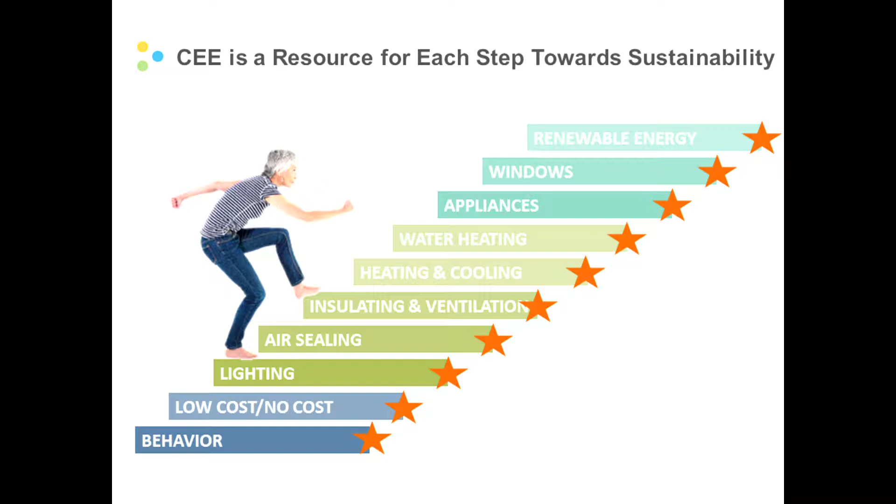We like to think of ourselves as being there for people every step of the way, no matter if you're looking at doing simple behavior change things like turning down your thermostat, or if you're all the way at the top of the ladder looking at renewable energy. We're here as a resource to help you with any questions you might have.

So what are some of the benefits of energy efficiency? I do have some prizes down at my booth. Save money - yes, always the first one. Reducing your bills, that's definitely one of the benefits.

By making your home more efficient, it should also increase the comfort. And you can also feel good by reducing your impact on the environment.

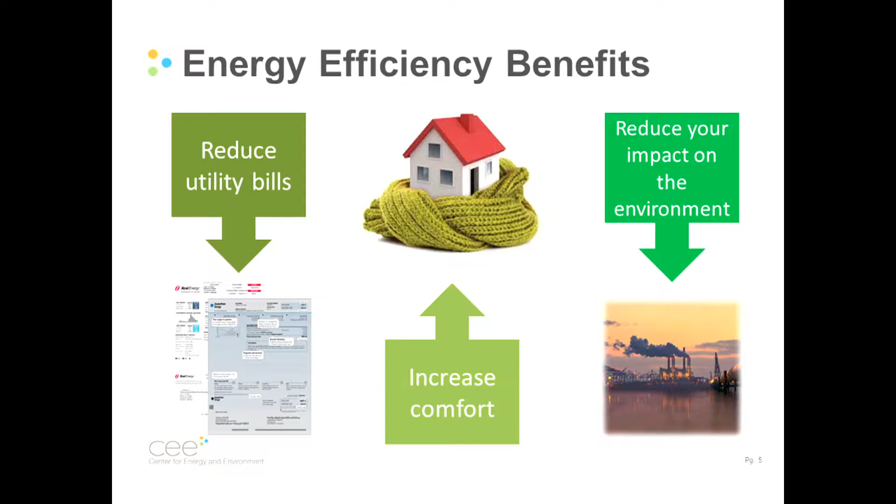We've come up with a recipe for an energy smart home in our 40 years of working on energy efficiency in Minnesota. That involves people having good habits, like turning down the thermostat, using good products. Always looking for the Energy Star label is a good step to making sure you're getting a product that has been tested. And then also making good investments.

Finding out what your different options are for making energy investments in your house, and then going with what's going to be most suitable for your house and also save energy.

I have right here broken down into 4 sectors the use of energy in a home. About 10% of your energy use goes to water heating, about 15% towards appliances, 20% towards lighting and electronics, and then the biggest portion of it, of course, goes to heating and cooling our homes.

I'm going to talk about each of these today, give you a few tips, go over some opportunities for different upgrades in each level.

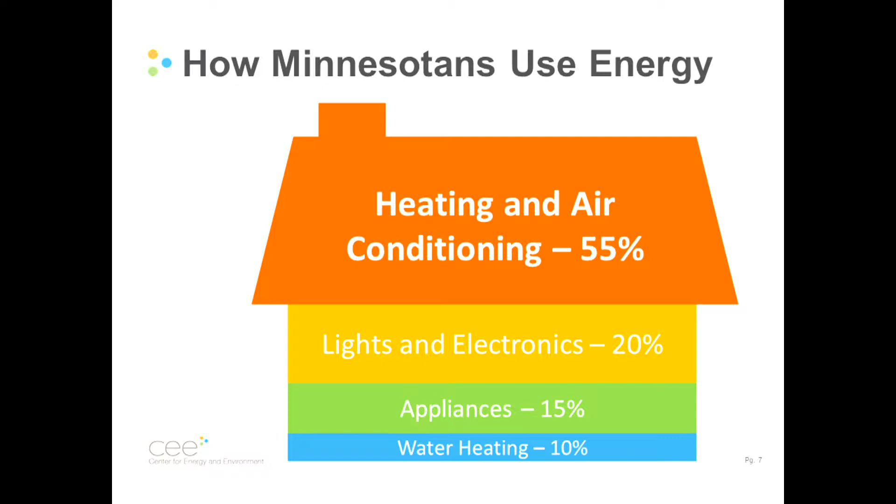Starting at the bottom of the house, the water heater is usually in the basement. Both for safety and efficiency, what's recommended is to have the temperature set at 120 degrees or below. Usually that's where the 2 triangles on the dial meet.

Just at the next notch up, which would be 130 degrees, it only takes 30 seconds of the water running for someone to get burned. Whereas at 120 degrees or less, it takes longer than 5 minutes.

Especially if you have any young children or other folks in the house that might like to turn on the water for a long period of time, just make sure it's at 120 or below, because that's plenty warm, so you can save on your energy and also be safe.

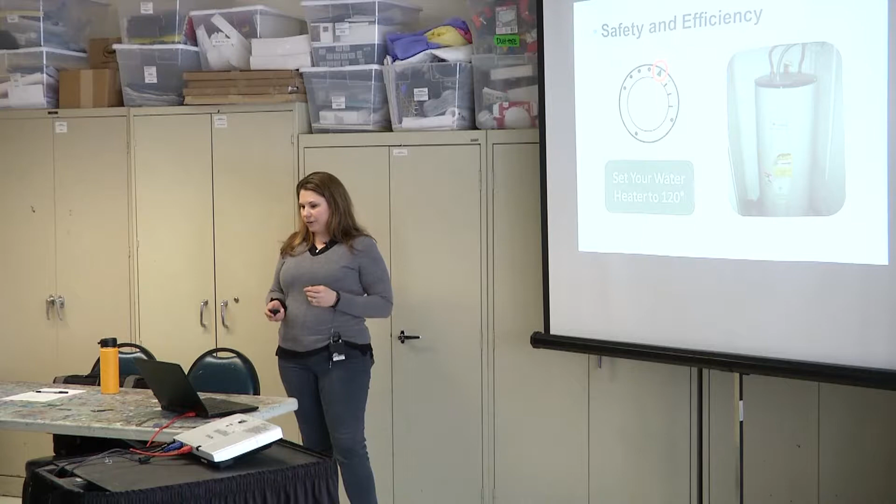Wrapping your water heater with a blanket, which is something we offer with our energy audit programs for no cost, will help provide an additional layer of insulation, keeping the tank warmer so it isn't having to use quite as much gas or electricity to keep the tank at that constant temperature.

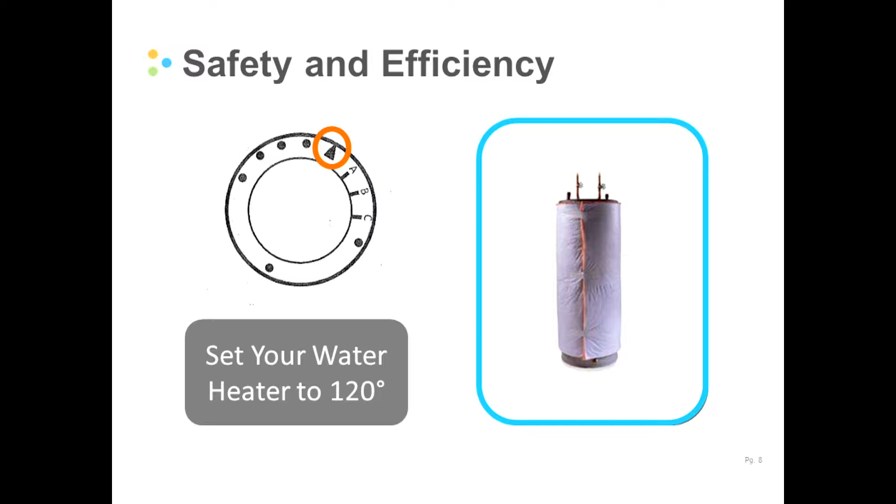Another thing you can do in terms of making your water heater more efficient is just flushing it out once or twice a year, just to clean out the sediment on the bottom of the tank.

Every tank water heater has one of these little valves - it looks like a hose tap on the side of it. So you can either just put a bucket under there or connect a hose and run it to the drain.

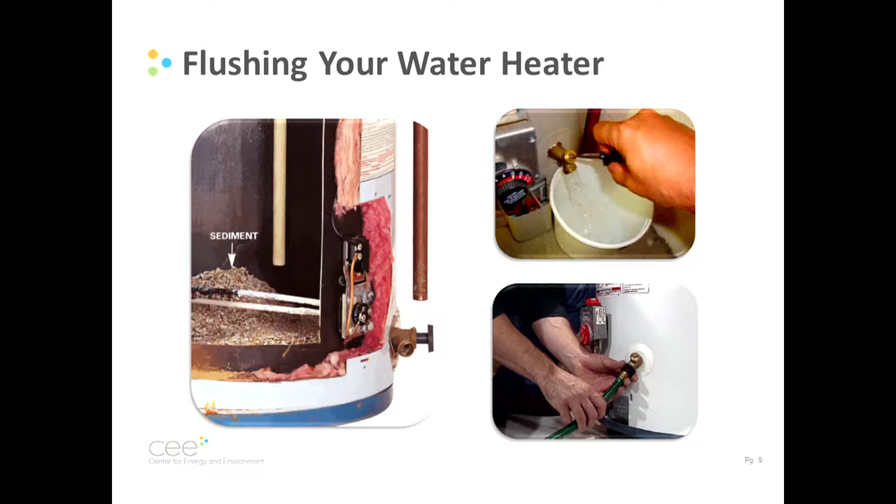The idea is just to clear this sediment off the bottom of the tank so the heating element isn't having to heat through all of that sediment to keep the water warmed up at the desired temperature. Cleaning that sediment out once or twice a year, you only need to flush out a few gallons. You don't need to turn the water off or anything. That will also help prolong the life of it, because then it's not going to prematurely rust out from having all that sediment swirling around constantly.

Another thing you can do in terms of water heating, which is 10% of utility use in the home, is using high efficiency shower heads and faucet aerators. These just introduce more air into the water flow, so it saves on how much water you're using and how much water you're having to heat. Sometimes people think, oh, it's not going to have any pressure, but oftentimes the pressure is better, because it's like when you put your thumb on the end of the hose. It often will increase the pressure, which is nice.

A lot of these different models are available at the store. We also install them in our Home Energy Squad visits. These are a great way for saving, especially with the faucets, because we don't need a ton of water when we're brushing our teeth or washing our hands.

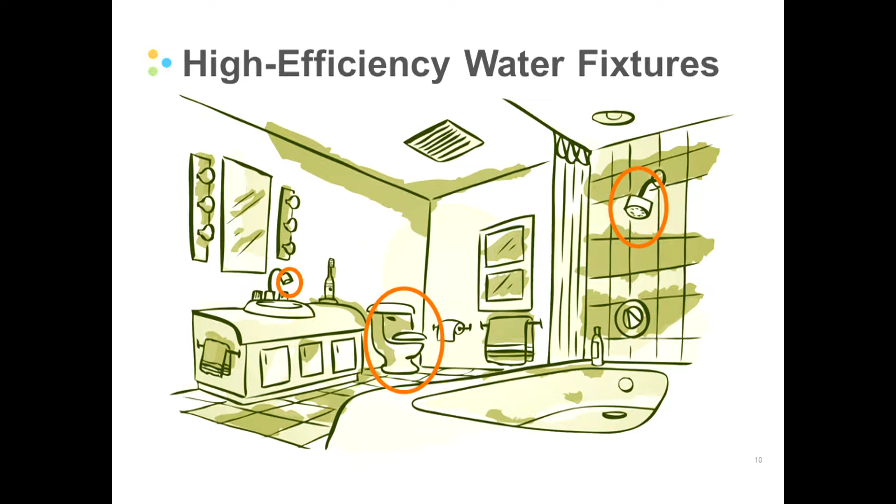Would that have an Energy Star label on that type of thing as well? I don't believe it would be right on the product. You might find some of the shower heads with the label on it, but the aerators are so small, they usually just come in like a little plastic sheath. But yeah, that's a great question.

Another thing you can do with water usage is using either a dual flush toilet or a low flush toilet. Some of the older models use up to 6 or 7 gallons per flush, which is really a lot of water. The newer models use 1.5 gallons for flushing. So that's a great opportunity for saving as well.

Appliances, about 15% here. So how many people are already washing your clothes in cold water? All right, that's pretty much everyone. This is great, because up to 90% of the energy used when washing your clothes goes to heating the water if you're doing that. So by washing in cold water, you save energy and also help the colors of your clothes last longer, so you don't have to buy as many new clothes.

Another way you can save with washing is by using front load washers. Sometimes they can save up to 40 gallons per load, just because of the different technology. So that's a great potential for saving as well.

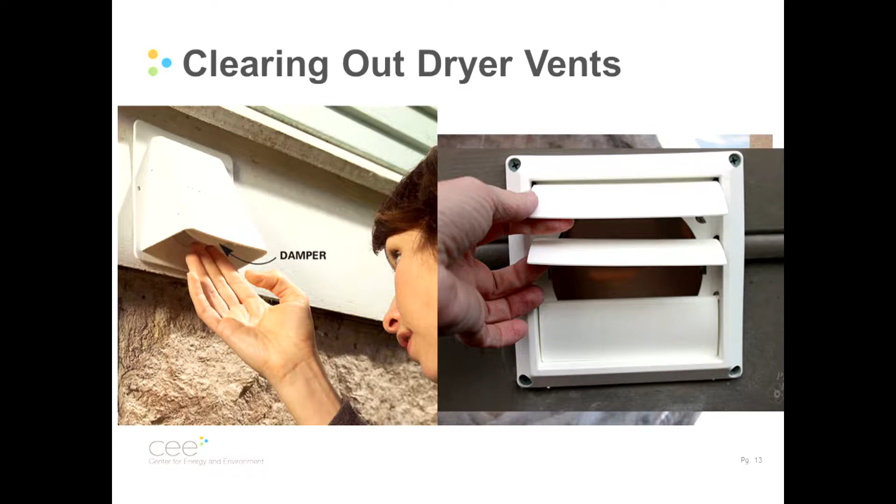This same size model uses only about $40 of electricity per year, whereas the older style probably uses close to $200 of electricity per year. The technology has just changed quite a bit.

Since the refrigerator is always running, it's good to go with an efficient model. I always like to remind people to check the energy guide because it rates similar models to the one you're looking at, and also look for the Energy Star label.

A few years ago, they came out with the 'most efficient' label, which is like the top tier of Energy Star. So Energy Star is very efficient, but then they have an upper tier even of that, shown by the most efficient label.

A lot of you, if you live in Bloomington, have Xcel Energy as your electricity provider. They have a refrigerator and freezer recycling program that runs from March through October every year.

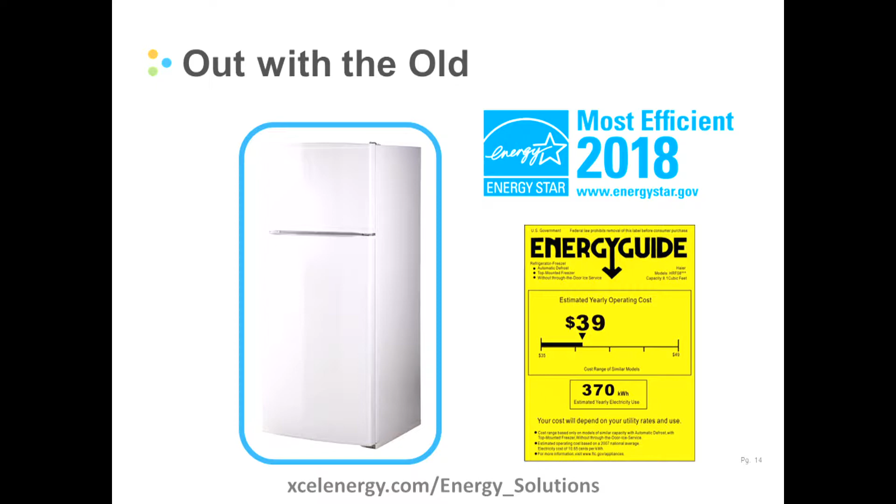They'll come and pick up your second refrigerator and give you either $35 or $50. Best of all, they'll haul it out of your basement or wherever it is, so I encourage people to take advantage of that.

When you get your new fridge, don't just put your old fridge in your garage or basement to chill the beverages. Go ahead and recycle that so you can get it off your electric bill.

Lighting and electronics make up about 20% of our energy use in the home.

The way these delightful goods were cooked was actually with an incandescent light bulb. That worked because with an incandescent bulb, 90% of the energy you're paying for is producing heat, not light. Tremendously inefficient, unless you're cooking miniature cakes and brownies.

Thankfully, we've made some evolutions in the past decade or two with lighting. The first wave we saw come along were halogen light bulbs. These use 10 to 20% less electricity, but they don't really last that long.

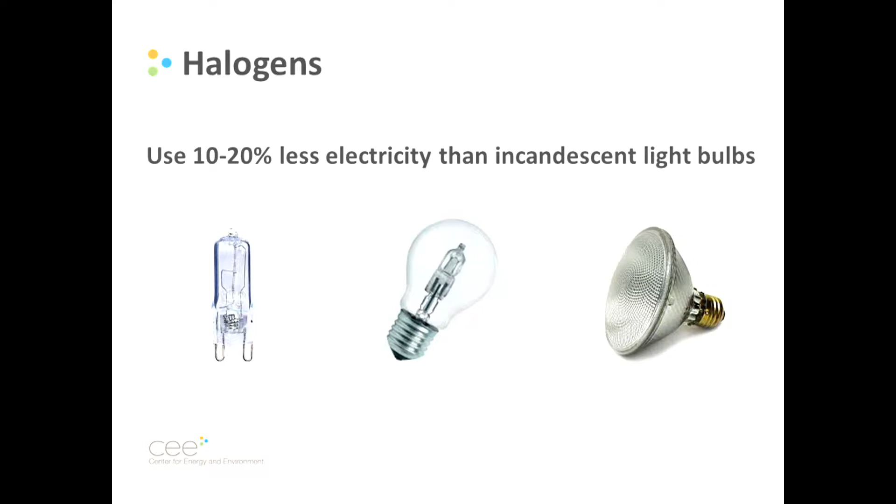Compact fluorescent light bulbs were the second product to come along, and these use 75% less electricity. People didn't always like how they performed, but they do save energy.

They also need to be recycled, so I like to remind people, especially here in Bloomington, you even have IKEA where you can bring them — all these places will recycle compact fluorescent light bulbs for free. I just keep mine in a bin and take them to Menards when I've got enough.

The first wave of LED light bulbs we saw come along were for more specialty uses like holiday lighting, flashlights, under-cabinet lighting, or the disco ball you maybe just put away after your New Year's celebration. All of those used LEDs.

Just in the past few years, we've seen all different styles of traditional residential light bulbs become available with LEDs. These are really great because they use 85% less electricity.

How many people are already using a lot of LEDs? I still have a lot of CFLs in my house, but I'm moving this way.

These LEDs are really great — some of them even last 25 years. So especially for those really hard to reach spots, they're great to get in there.

We do install these in unlimited amounts during our home energy squad visits. I think we've even installed like 60 in someone's house, and that's all included in the fee.

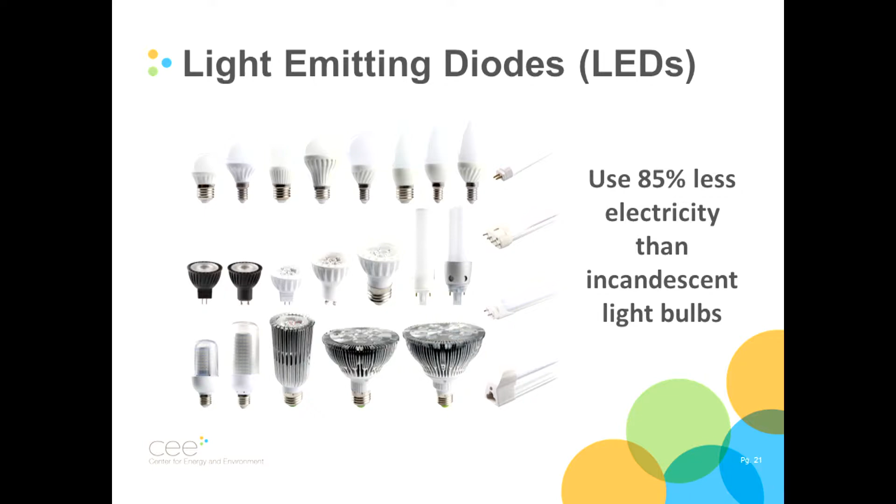So these are really, really nice products. I get a lot of questions. I actually just got one today from a gal who wanted to know how to figure out how to get a bright LED. What you want to look at is the lumen output.

The most traditionally used light bulb was the 60-watt incandescent, which produced about 800 lumens. So if you're looking for an LED light bulb that's brighter, look for 800 or 900 lumens. If you want a really bright one for a sewing or reading lamp, go over 1200 lumens, because that will give you a nice bright light.

But it's hard to know because you can't measure it with wattage anymore. For instance, this light bulb, which used 12 watts of electricity a few years ago, that same equivalent to the 60-watt bulb now only uses 9. So LEDs just keep getting more and more efficient, so it's hard to go off the wattage.

You also want to keep in mind the Kelvin temperature. The 60-watt incandescent, the most common bulb, was right around 3000 in Kelvin temperature. If you're looking for something real standard, you want to stay probably around there. For more of a work setting, you'd probably want to get up over 7000 in terms of Kelvin temperature.

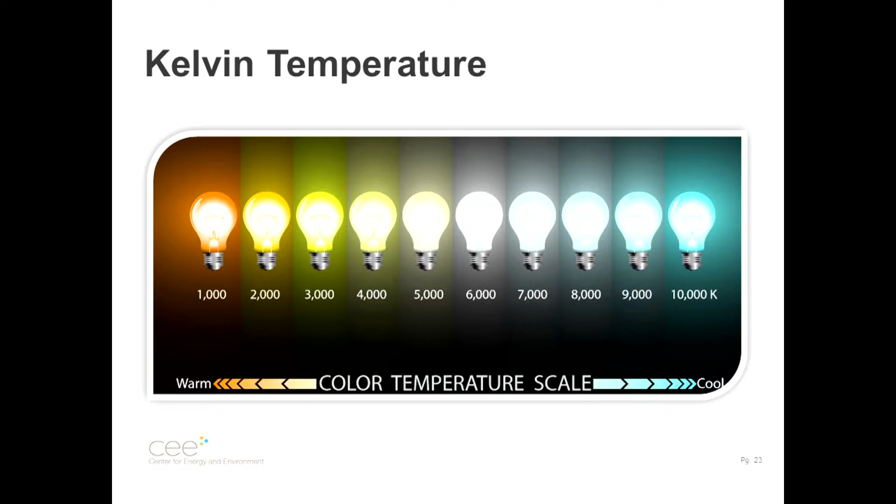This measures what sort of color temperature, and the lumens on the box will tell you how bright it is. The higher the number, the brighter it's going to be. So like 1300 lumens would probably be like a 120-watt incandescent light bulb, like super bright.

So in order to stop wasting that energy and save yourself some money, you can manage your phantom load. I guess you could just unplug it from the wall, but I don't really want to get behind my entertainment center and unplug everything. So I've seen people set things up onto two different power strips, one that can be turned off without losing programming, and one that they leave constantly on because they don't want to lose the programming.

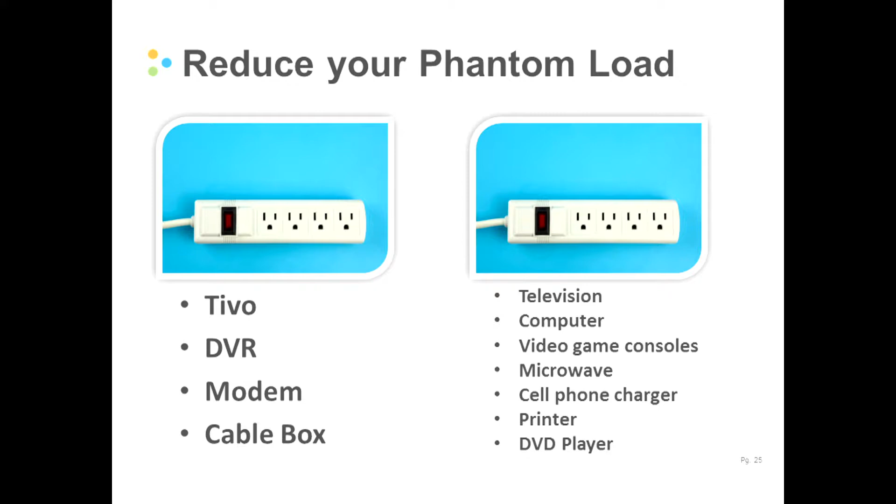We want to make energy efficiency easy for people, because if it's not easy, you probably won't keep doing it. So to manage the phantom load, just have the good habit of turning off that switch when you leave the room, and turn off your lights too. That's what we call Toby, turn off lights behind you.

And then you can also find these power management strips where some of them have a remote control. You can mount it on the wall, flip that off when you leave the room, and cut that phantom load. Each entertainment center that you put on one of these power saving strips will save you about $10 to $15 a year.

And that's probably how much something like this costs. These are a little bit more, maybe like $30, but hey, a 1 to 2 year payback, that's pretty good.

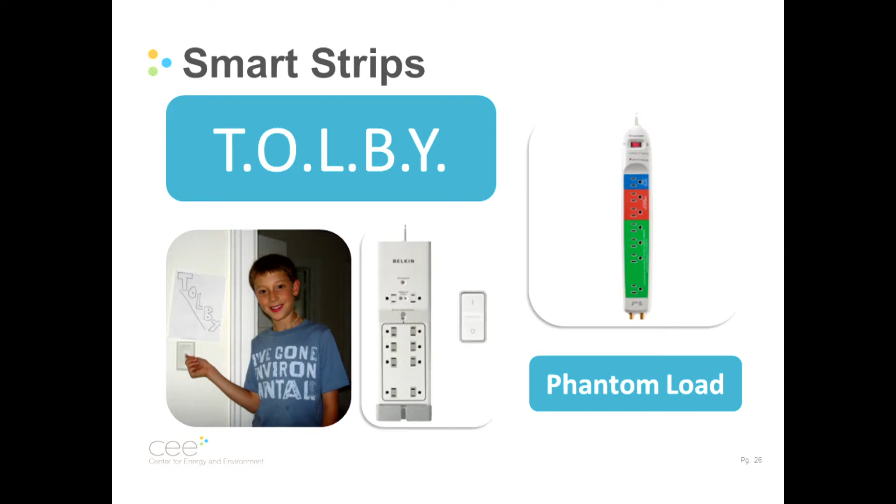And you can feel good because you're doing something to help the environment and not waste energy.

All right, made it up to the top of the house here. Biggest chunk. How many people already have a programmable thermostat? And is it programmed? Keep your hands up. Yeah, that's the key right there.

So programmable thermostats are great. We like to say you can just set it and forget it. So you can program them to save while you're sleeping, if you're gone during the day at work. By doing 8 degrees for 8 hours with those 2 setbacks, at least 5 days a week, will save you roughly around $100 a year. So that's a decent chunk of money. And if you're not home or you're sleeping, the house doesn't need to be that warm.

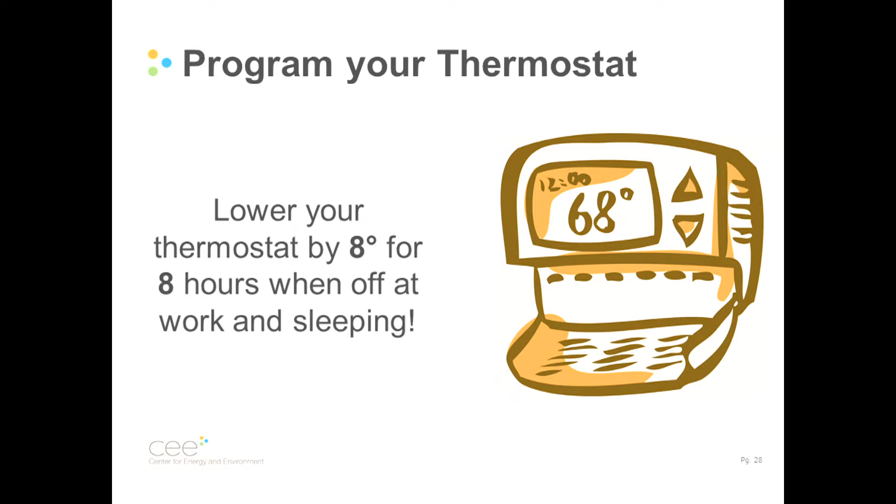And you can also do the saver switch with Xcel Energy, where you get the rebate for participating in the summer. So you can set your thermostat up in the summer when you're gone, and then just lower it down before you get home so you're not dying of a heat stroke. But that's another great program to look at.

And that kind of goes into the smart thermostat. So this is kind of the new wave. Does anyone already have a smart thermostat? All right. We just started installing these a few months ago in our Home Energy Squad program, so we have these available too. So these you can control with your phone. They're kind of cool. You can get a lot of feedback. You get a little leaf award with the Nest one if you're saving more energy than your neighbors. So they're kind of fun.

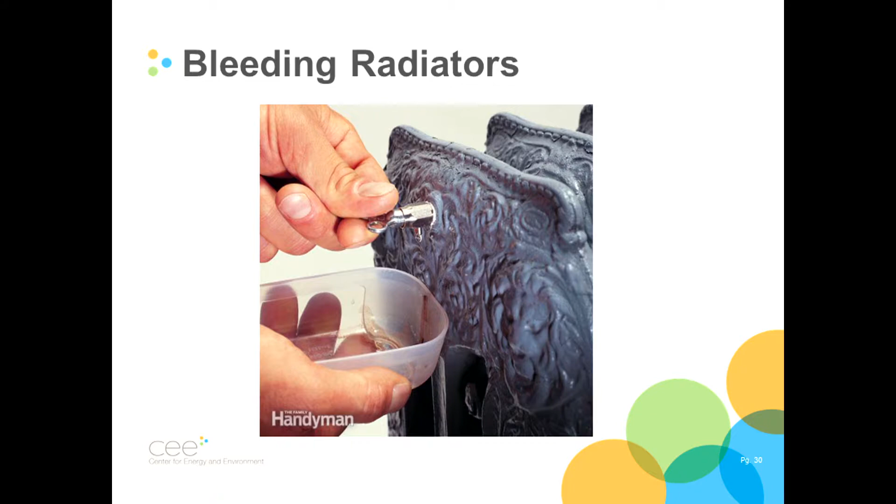And then I've thrown in some tips just about good habits that people can do with heating. So I don't know if any of you have radiators, probably not that many people here in Bloomington. But just bleeding the radiators is a good thing to do.

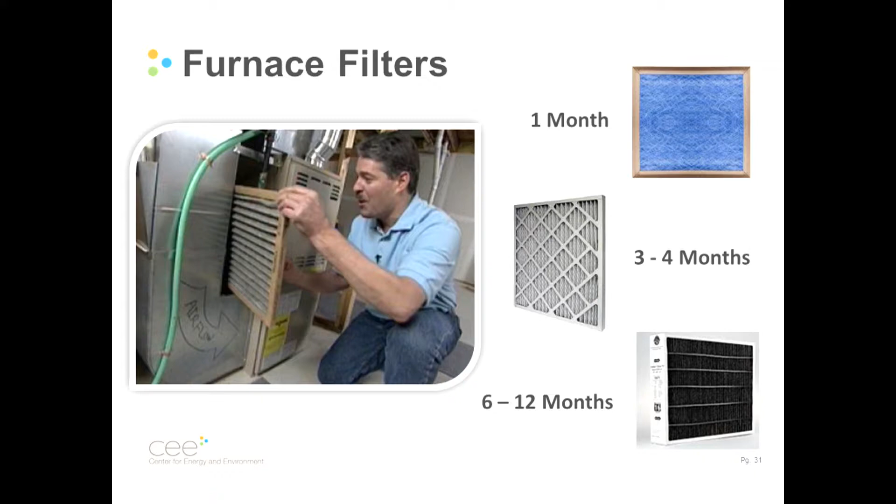Also, you wouldn't believe how many houses I went into when I was doing energy audits where people didn't know they had a furnace filter or that they needed to switch it out. They do need to be switched out at least once a year, some more frequently. But that just helps to protect your furnace and get the junk out of the air so you're not breathing it in. And I just like to remind people, I know probably all of you are very good about this, but not everyone is, so I just throw it in there.

Some other things you see when doing energy audits, a lot of furniture ends up in front of the registers, and so then you're not getting a very good airflow. The cold air can't be pulled back into the furnace to be reheated if there's a big couch in the way. So just make sure you can try to get the furniture out of the way to pull the air back into those returns and then supply it where it needs to go.

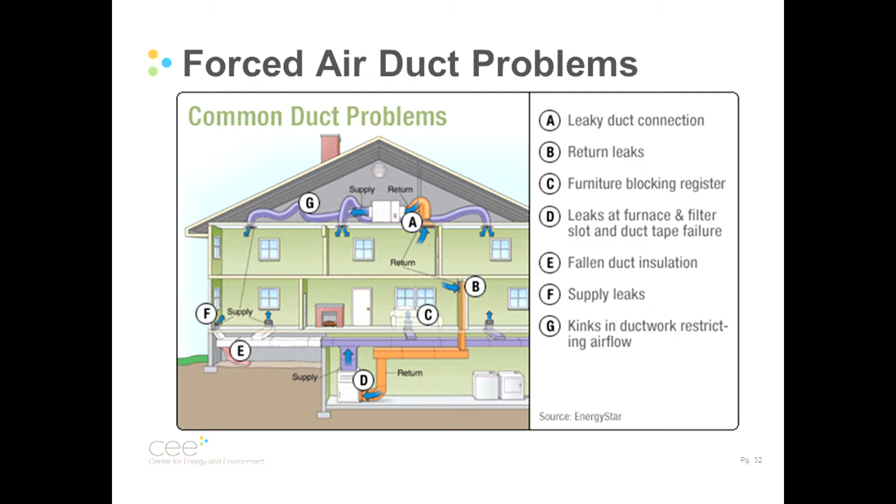Other things you can do, if you can see the ductwork in your basement, taping around all of the joints will tighten up the system so the air is being delivered more efficiently to wherever it needs to go. Just a couple things there.

So there are a lot of things that you can do yourself to make your house more efficient. Caulking around the windows, putting the plastic on, putting the gasket seals on the outlets on the exterior walls. These are all great things to do.

But ultimately, if you're feeling like your house is really drafty, chances are that you're losing a lot of heat from the conditioned heated space of your house to the unconditioned attic space. So anything penetrating from this heated level to the unheated level, attic hatches, chimney stacks, if you have any ductwork, light fixtures, all the wires that run, they all have little gaps around them.

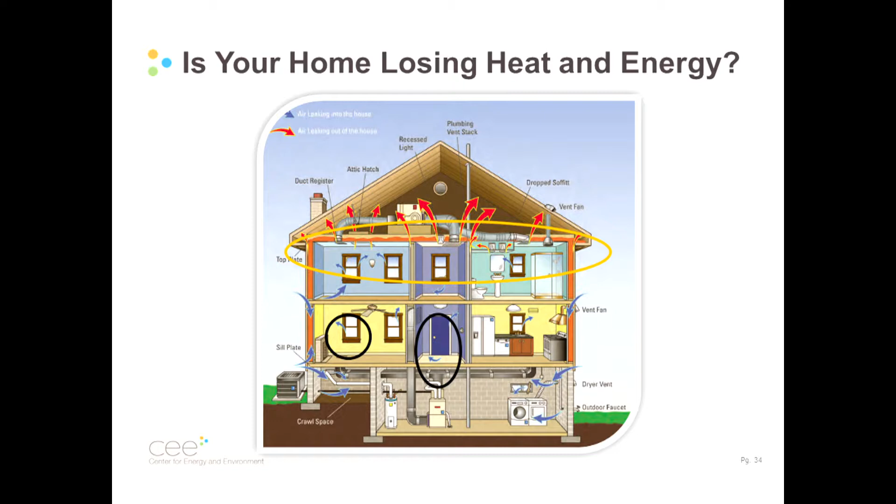And if they're not properly sealed, that warm air that you're paying for is going to go up and out, and then in turn it's going to pull in cold air from outside, which makes it feel really drafty and uncomfortable. So it's hard to know, but if you're experiencing ice dams or having really dry air in your house, that's another indication that your house might be losing a lot of energy.

So if that warm, moist air gets out of the house, it's going to pull in that cold, dry air, and then you're going to feel like you need to use a lot of humidification, which also uses electricity that you're paying for. Ice dams.

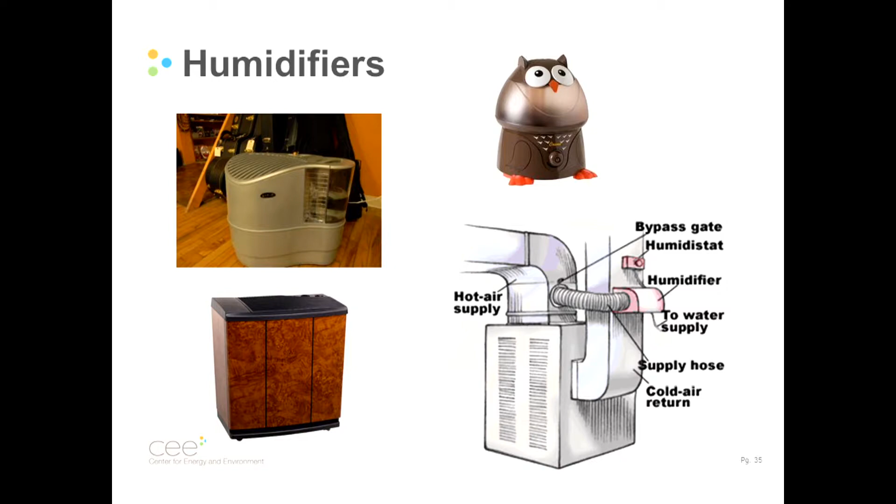This year is probably going to be a really good one to spot ice dams. That's almost a surefire sign that you're losing heat, because the insulation acts like an air filter for air movement. Unless air sealing has been done underneath the insulation, warm air is still going to rise up and out, and when it melts, it travels down and freezes over the unheated soffit. If it gets bad enough, it backs up into people's houses and runs down the walls, and that's not what you want.

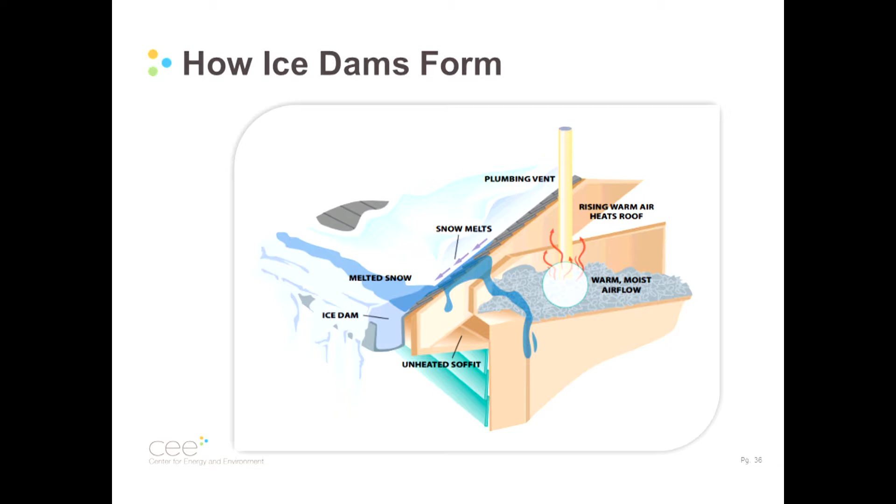That gets really costly. Do you guys, like CEE, if you do have that, maybe know what's happening in the attic? Is there a program through CEE to deal with it?

If it's mold, yeah, if mold does enter it -- we do energy audits and we offer financing. We do a lot of research and stuff, but we refer people to other programs and contractors. And we have a whole team of energy advisors, who have been energy auditors, that connect people to next steps, because every house is different and the steps that people need to take are different. So we have a whole team of folks that help people along the way.

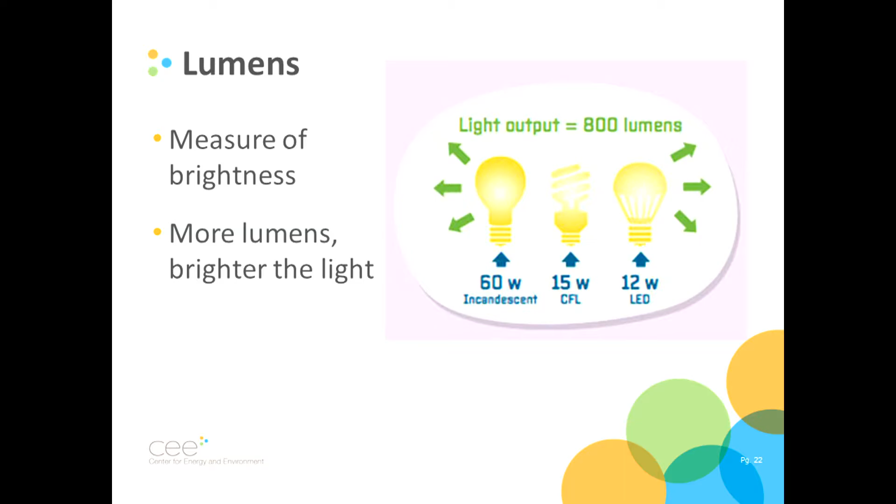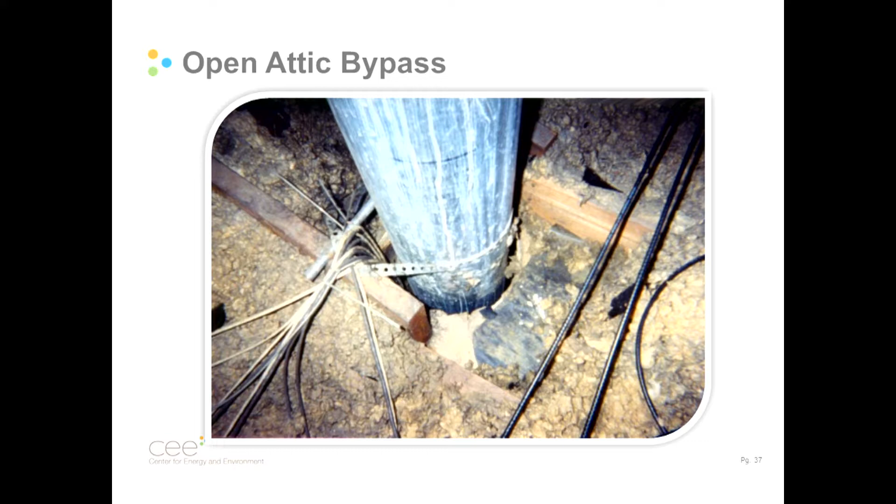Here's another picture of some of the opportunities for air sealing in the attic. Either with spray foam or caulk, those gaps need to be sealed before the insulation is added on top. It's hard to figure these things out, because how many of us really go climb in our attic? But there are ways you can look at the darkened insulation, and if you see cobwebs, those are signs of air movement.

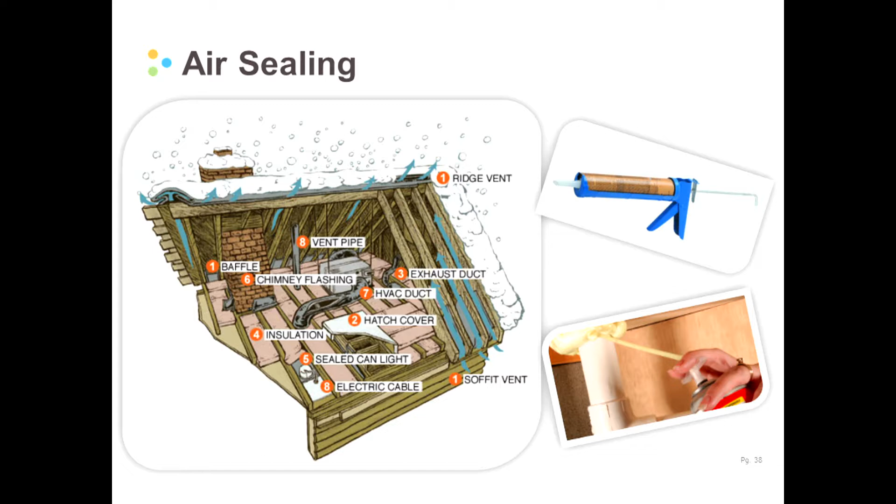But we have a great program here in Bloomington. Our Home Energy Squad program -- half of the visit is paid for by the HRA, so it's a great deal. We visit 1 to 4 unit buildings. There are other programs for larger buildings offered by the utilities. We also can connect people with the electric appliance saving program, for income qualified households. You can get free refrigerators, air conditioners. It's a really great program.

So what happens at an energy audit? The ones we conduct, the Home Energy Squad visits, are about 2.5 hours. We do testing with the blower door test, look at the insulation, and check the heating system and water heater. If there is a recommendation for improving insulation levels, our energy auditors have actually been trained by contractors to write up a quote for people that's honored by contractors. This has been a new addition to our program, and people really love it, because then they don't have to take an additional 3 or 4 days off work. We're a nonprofit -- we don't get any money from this. We're just trying to help people make their homes more comfortable and efficient.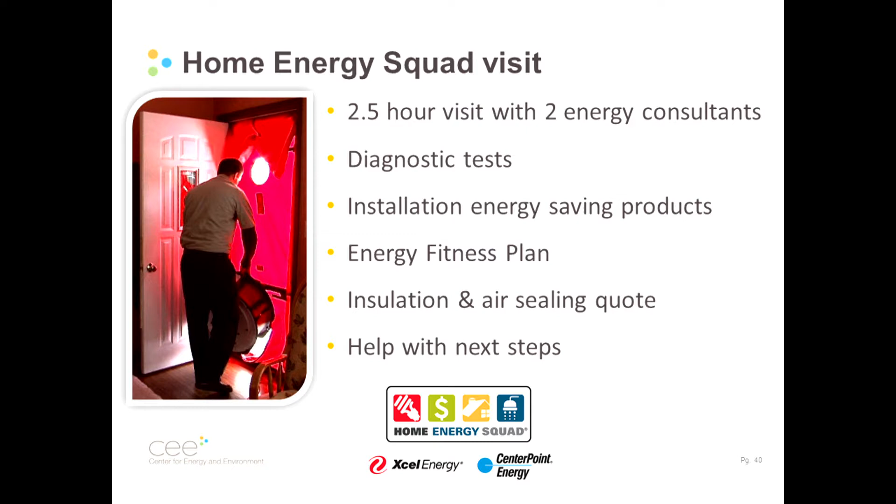We just want to make it easy for you and give you peace of mind that you've brought your home to a basic level of efficiency and that you're doing what you can. Here's some more pictures of what we do. We'll use the infrared camera along with the blower door if there's at least 15 degrees difference from the outside temperature to the inside temperature, which there often is. We'll put all of the recommendations and those images into a nice report for you with next steps.

And bonus, we also -- what's that? Is there a better or worse time of year to do your energy audit? We do it all year long.

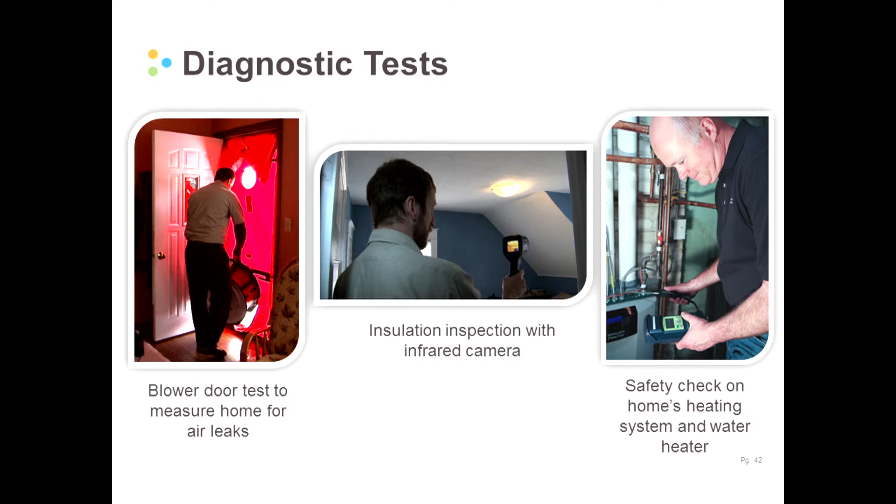We visit homes almost every day of the year, so we can always do the testing. And the bonus is we also install products like programmable thermostats, door weather stripping, high efficiency shower heads, faucet aerators, water heater blankets, LED light bulbs - all of these at no additional cost. We just want to help people start saving right away.

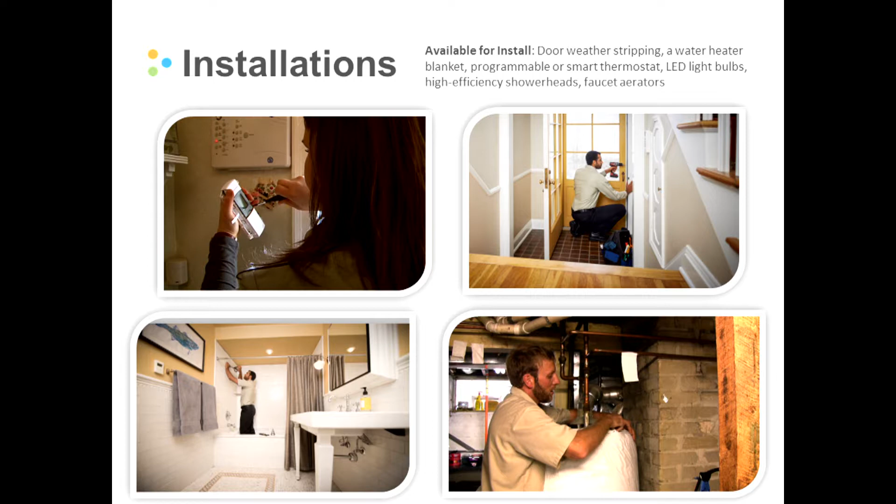This program is very highly subsidized by the utility companies, CenterPoint Energy and Xcel Energy. It helps them meet their savings goals, so that's why it seems like an incredibly good deal.

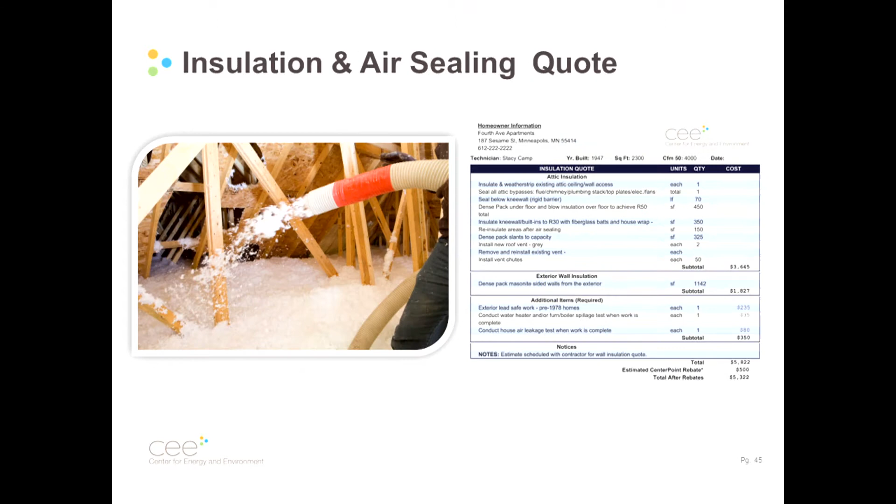Usually it's $100, only $50 in Bloomington and many of the surrounding communities here. We also have free visits for income qualifying households, and we can qualify people for the energy appliance saving program. So if you are interested in scheduling, you can do that later on after Jim's done talking. I just wanted to let you know that it's available, and Jim's going to talk to you a little bit about some of the home improvement financing to help people complete these recommendations that come up.

Mine's very quick. Financing is not an interesting topic, so I'm going to go.

Jim, where are you located? We have 2 different offices - one in downtown Minneapolis, and our residential field office is in St. Paul. Are there any other questions?

My name is Jim Hasnick. I also work at CEE, and I guess I wanted to ask first, is everyone here live in Bloomington, or what city? Any other cities?

Bloomington does have their own home improvement program, which I will touch on in a second. But what we do - I've been at CEE for 24 years - we do financing programs with Minnesota Housing Finance Agency, Department of Commerce, and we administer a lot of different programs throughout the metro area, programs like Bloomington has. Bloomington does have a 2% loan, and they have a 0% deferred loan depending on income. But if you don't meet those income requirements, people need ways to pay for new heating systems, air conditioning, solar.

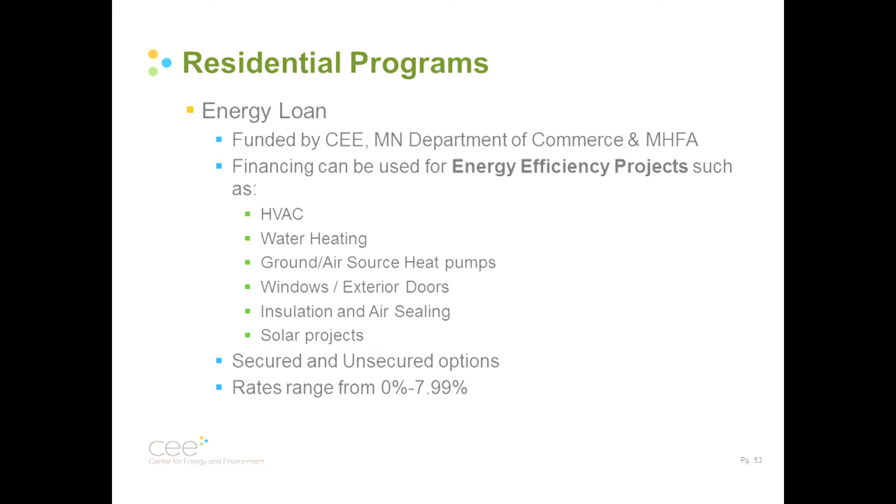And then on the commercial side of things, if you have businesses, we do have commercial financing also for energy improvements, from refrigeration to solar to your heating systems and geothermal things like that. That's really all I have, because there's not a lot to it, just more specific questions. I just wanted to let you know that there are programs out there if you need the funding to follow through with these projects that you discover through having the audit, or just want to move forward with something else.

Any questions for either one of us? Well, I was going to ask for a business card, but I see your phone number up there, so I'm just going to copy it down. Okay, I have my card too. I'll give you my card as well.

Or does anyone want to come up and? Solar.

I mean, you have to have a furnace that's powered by the solar. No, not at all. We would always recommend having the audit done, doing these types of things, the insulation, your bypasses, sealing all those first. The cheapest energy is the energy you don't use. It's free. So by saving it, by doing these other things, that's your best start.